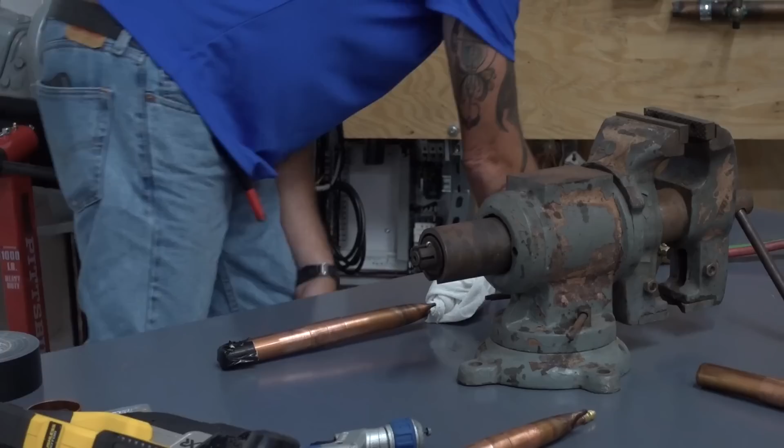In this next video in the series, we're going to talk about the importance of nitrogen purge and nitrogen flow. We're also going to introduce a basic calculator I've spun up to help us calculate how much you need to purge before you flow. This is the first time I've ever done this, so some of you may have additions, changes, or suggestions for it. I'm always open to that feedback. But the basics are we always need to purge enough nitrogen to displace the oxygen before we flow.

I was going to talk through application, which starts with: what are you actually looking for, what do you do when, how important is it when, and what steps do you take in the field. I asked some guys, hey, when you are flowing, when is it easy to flow nitrogen, when is it not so easy, what are some things where you think it might be impossible, and how do we work through that? So we're going to go through best practices for application.

The first thing is your piping, when it comes to the job, you want it to be capped. If you have a supply line come through and it's uncapped, it already has oxides built up, and you're never going to get that back out. So send it back. They're supposed to send you hard copper shipped properly. So anytime you open it, look at a fitting, or go to put something together, look through the pipe first.

You want to be looking through, making sure you removed both of the caps, that they sit flush, making sure that's not there. We've all, in running service, found weird stuff in a filter dryer or a separator and thought, how did that get in there? Not sure how it got in there, but on service calls we've found coins, screws, things where you think, who in the world did this?

But it's easy to do. You have a bucket there, somebody dropped something in, you set it down for a second, somebody kicked something into your pipe. Before you actually dry fit a joint, you want to look through whatever it is and make sure you don't have something in there. So that's the first application.

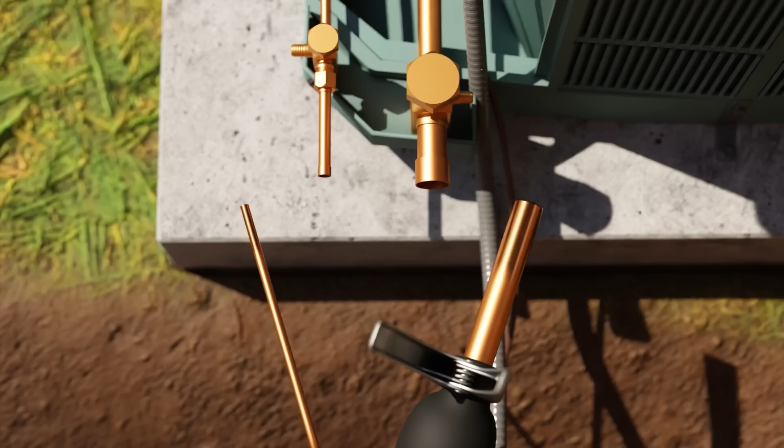Once it's out, you're reaming it, getting rid of that little edge from when you cut it. Once again, this is where application is important. Reaming is important, it helps the overall flow and helps it not catch oil.

But if you're looking at a pipe that's sitting straight up and down and you don't have any opportunity to get it sideways or down before you deburr it, I'm going to go ahead and say don't deburr it. The bigger evil is to drop that burr down in the pipe than it is to leave it attached to the pipe. A lot of that is to say being conscious of your application and what you're doing is the most important thing.

Complacency is what kills things across the board. As soon as you become mindless - I do this all the time, I grab that piece, put it in, move on, this is what I do - and I know a lot of what you do can become monotonous, but that monotony and complacency becomes the killer. The thing that you didn't even realize you did, not where you made some conscious decision because of application.

This is the best way to do that. Rarely is that going to be wrong. Most people here are intelligent people, and if you're actually engaging your think brain, you can come up with the best application for what you're doing.

It's when you get in that mindset of 'I'm tired, I'm working,' that's when really dumb things happen. In the pipe fitting side, even more so in service, you hear these stories. Matthew can tell you some stories from where he worked previously, stuff where you're like, how could somebody possibly do that? And it happens because you've been up a long time, you've worked a while, and you're doing a thing without engaging your think brain. So that's a lot of what I'm going to go through.

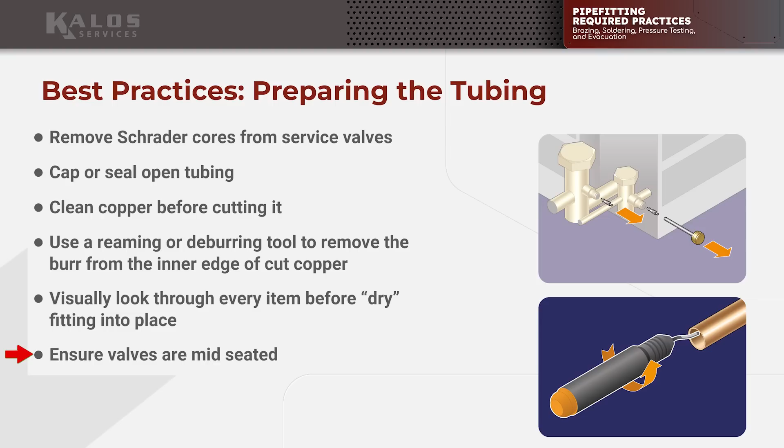So you just get in that habit of every time you look through, you dry fit, then you move on. Another thing that came up a lot for bench fitting, when you're pre-making a bunch of valves: if at all possible, you want that valve mid-seated, meaning in that middle point, because if you compress the gasket while you're heating it, it doesn't take a lot of heat to deform it. So if you're putting in a ball valve, set it at a midpoint. An EPR, adjust it to a midpoint. CDST, get your little tool out and pre-open them all to 50%. All the way back seated is compressed, all the way front seated is compressed, so anything with a seal, you want that in its open state while you're getting it heated or unheated.

Another key thing, the question came up about when you're bench fitting and assembling valves — how do you flow nitrogen when you do that? If you think about it for about 3 seconds, you can figure it out: you can put the hose in the end and tape it off, or come up with a plug that still lets you flow nitrogen. If it's really closely assembled and you're afraid it'll melt your hose or whatever, wrap a rag around it or something. But you still want nitrogen flowing through that valve.

Cleaning it later, cupric oxide just doesn't come out easy — if you've ever tried to do it, it's a pain in the butt. The only thing you're probably not going to be able to flow through would be a hermetic compressor. So if you're working on something smaller with a hermetic compressor, you're obviously not going to flow through it, but you can still displace as much oxygen as possible. We're never going to get 100% of the oxygen out, we're not even trying to, but we're trying to displace as much of it with nitrogen as we possibly can. So be creative if you have to.

The thing I always want to say is don't let an ideal of perfection get in the way of doing the best that you can right now. So you're doing a whole new setup where you're pipe fitting, the application is perfect, you get it all set up, you purge — I think the next slide covers the purge.

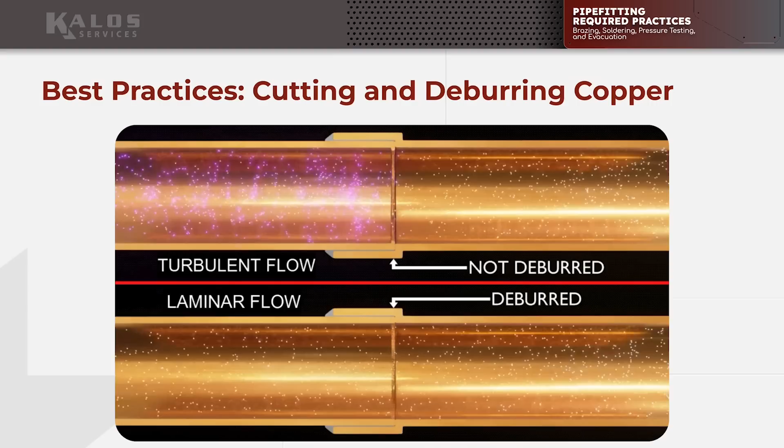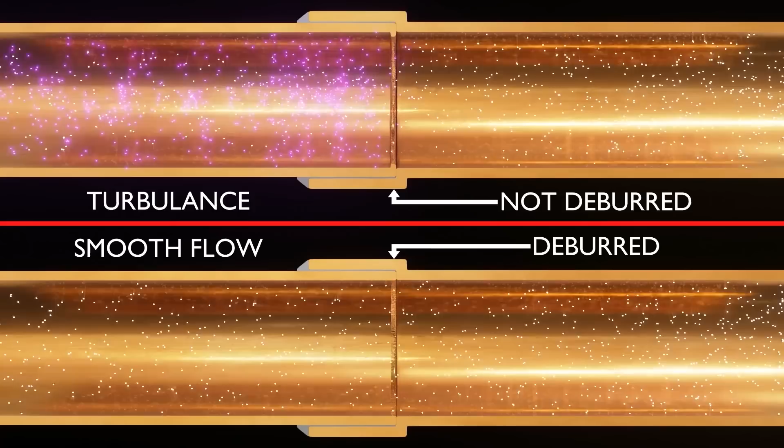First, we want to show quickly, this is the reason why you deburr. It actually matters more in market refrigeration than in a lot of other spaces, because that turbulence builds up — as Nathan said, it can gather oil, but it also actually presents resistance, so you get turbulence on the other side of a non-deburred section. But we don't want deburring to become a bigger problem, because we're dropping copper shavings, and just blowing some nitrogen afterwards isn't going to get rid of 500 feet of copper shavings left in the tubing. So we don't want to create a problem while solving a problem, but deburring is a nice standard practice, and they make tools, those circular deburring tools, that make it pretty easy.

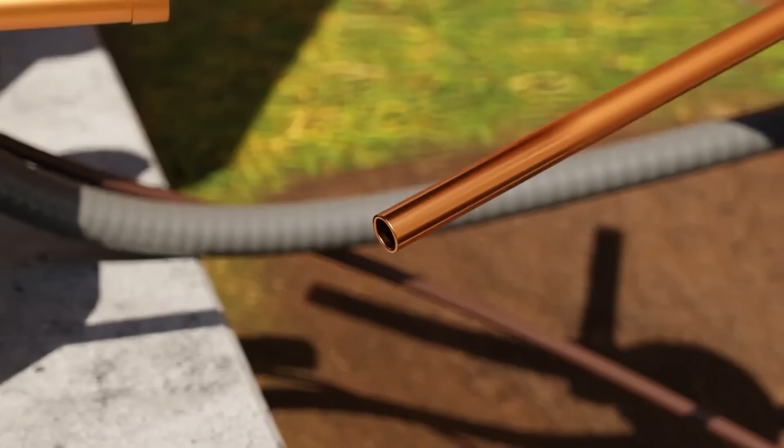Some of you use the old pencil type. But deburring during pipe fitting is a step that gets missed a lot in the industry, but it is a good best practice and does help with oil return.

You can tell, you'll even hear sometimes a loud circuit. Now sometimes that can be that the gas is flashing in it, so that might not always be the case, but there are loud circuits. It usually is that there's some sort of irregularity there, so you're not getting a laminar flow through it, so you'll hear refrigerant moving, and a lot of times that's that the burr is pretty good in there.

Now we're going back to, this slide is just about when you're inserting it, the rule of thumb, which I never actually thought about until I asked why different size couplings have different depths. It's just for strength, you want that insertion to be about the full dimension of the pipe, so your coupling will be twice as long as the dimension of your pipe. That's just for pipe size, strength, whatever.

You're trying to draw that alloy in there, correct. Not all the way to the center, but you're trying to get at least half of that fitting. You're wanting to see that discoloration of drawing the alloy in that far. That tells you have penetration.

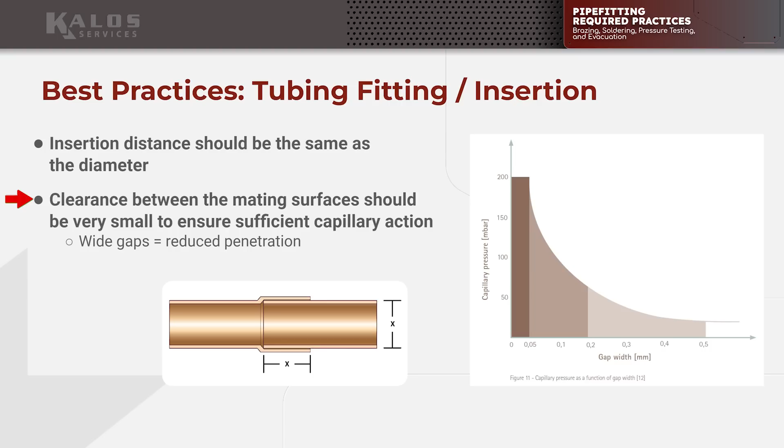Same thing with the capillary action, you need a certain size gap. That's basically just saying use the right size coupling for your pipe. Don't say, hey, I'm out, so I'm going to put too big of one and crimp it down, or I'm going to do an inside coupling, so I'll just take a smaller pipe and put it in. If you're using the right size coupling for the right size pipe, your gap is going to be correct.

But same thing if you have a bent piece of pipe and you're like, well, it fits and I can fill that gap - just go ahead and cut it back past that bent piece and get a good fitting there, particularly when you're doing a new line set, new store, so there's no time constraint. Let's go ahead and get it correct.

It's counterintuitive because a lot of people think bigger gap means you'll pull in more solder. It's not - the tighter the gap, the more capillary action. That's how capillary action works. The smaller the channel or gap, the further it will actually draw in.

Right, because this isn't like fitting PVC, where I've had guys say that if you have it too much, you'll scrape it off. It's not glue, we're not gluing the fitting. You really do want it tight enough that it'll take some force to get it in, but it will fit.

So same thing about being cognizant - you ever push it in and it just doesn't feel right, like it goes in real easy? Maybe take a minute and think through it. Maybe you have a plumbing coupling for some reason, maybe something's wrong. You should get used to it taking some force to get those seated.

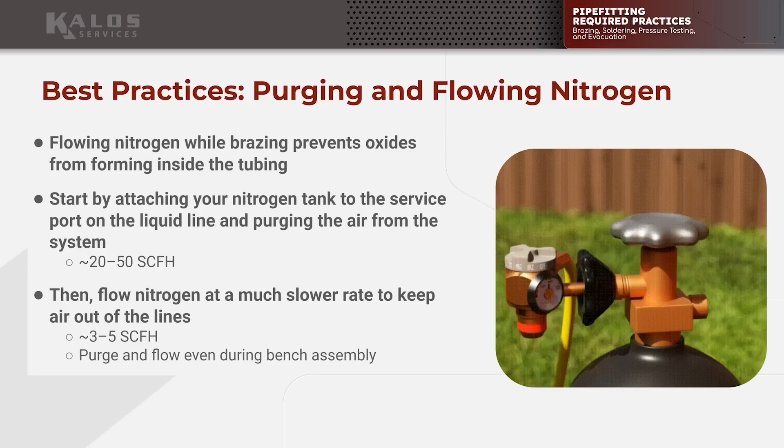So this gets us down to the meat of what we're talking about, which is flowing nitrogen. I wanted to go through - this is telling you how to do it, which everybody should know the basics on, but I'll also walk through some terms. Guys will use different terms - I've heard people say, oh, well, you purge nitrogen while you're brazing. Fine if you say it, but it's not the correct thing to use. Purge is while you are displacing oxygen - you're getting all of the air out and getting it replaced as much as possible with nitrogen in there.

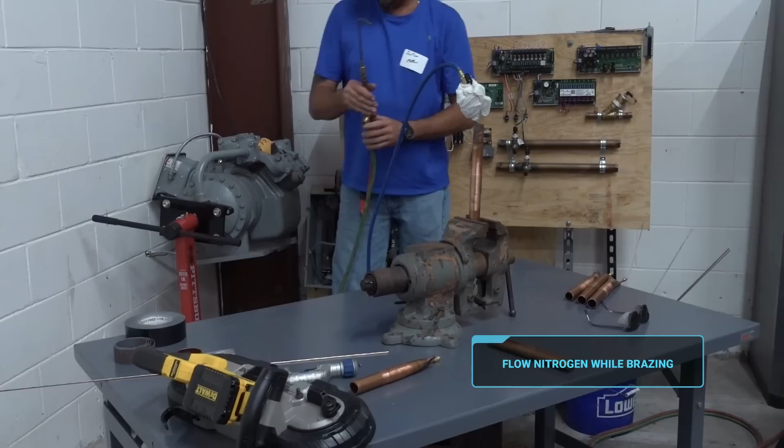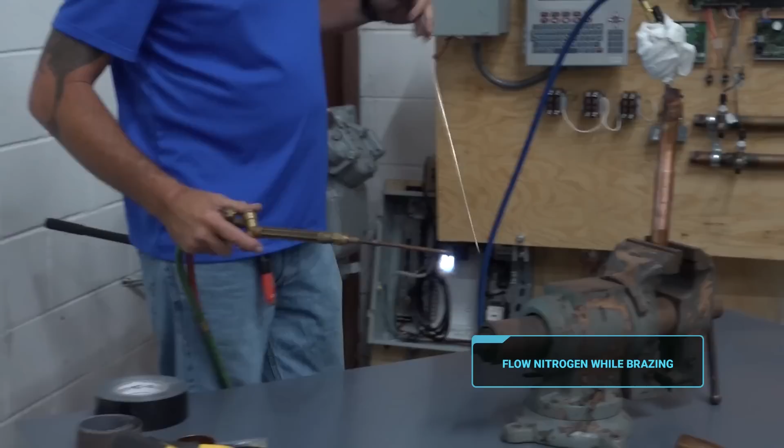Then you're backing it down to flow, which is you're still adding some, so you're at higher pressure than the atmosphere, so air doesn't come back in what you just purged out of. This was actually an interesting thing where we needed to get a recommendation for how much purge to do, because up until now you've always just told people, well, purge till there's no air, that's the end. So I was thinking through, well, how do you know? It's pretty easy if you're doing a 4-foot piece of pipe or a 20-foot piece, but what if it's 500 feet of 3 1/8 inch pipe? How much purge do you need before all of that's out of there?

Looking through, guidance on how much nitrogen to use didn't really exist. Anything that told you how much to do basically just said, do it until the air's gone. That doesn't work for me because it doesn't tell you anything. So we built a little calculator. It's in your form, there's a download for it, you can find it later. You punch in your feet, how much whatever, and it'll tell you how long, at what pressure should you purge, and how much of your tank that's going to use.

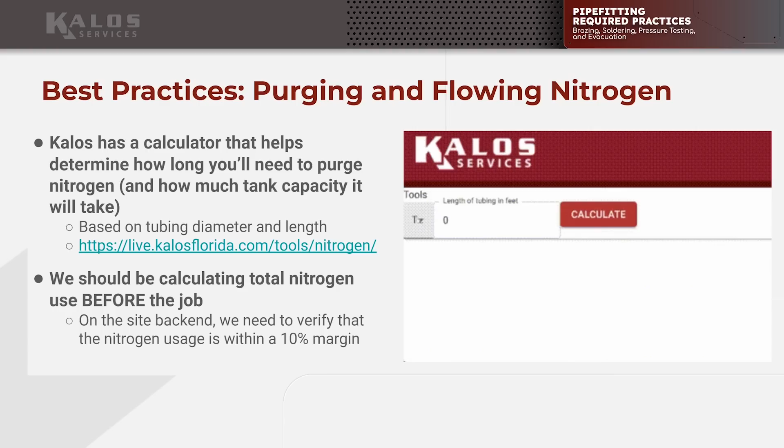So you have an idea how much got out. After that, it gets easier, because how much should you add once you're brazing? Just enough that no air can come in. That part's pretty easy: you put some tape over the end, you poke a hole. Can you feel air coming out? You're good. Can you not feel anything at all, like you put your hand over it and you don't feel anything? Well, then maybe you're losing a little bit through the joints and you may need to increase it.

That's a really important distinction. We're not pressurizing, okay, we're flowing. That's why we use a flow regulator, not a pressure regulator, for flowing. We don't want to pressurize. Of course there is a pressure differential, but it's infinitesimal, it's tiny. We do not want to pressurize, because pressurizing causes your joints to blow apart when you're trying to braze them. You want a tiny flow, 3 to 5 SCFH, which if you want to be really technical, that's exactly one gnat fart worth of pressure.

So it's scientifically proven. Whereas when you're purging, that's when you open that regulator up. The math I did for this calculator is based on 20 to 50 SCFH of flow for a typical nitrogen regulator. You're going to have some regulators that produce more than that, but I'll give away the lead here: we've got to purge a lot longer than anyone ever thought once we did the math. It can be a long time, it can be like 5 minutes in some cases, where you're leaving that thing open, setting it to 100 PSI, and just letting her fly.

And who knew, right? You look at all the books and manuals, nobody tells you. Like Nathan said, they just say, till the air's out. So it just took a little bit of math, that's why we created that calculator. Because my assertion is a lot of times on long runs you're like, I know I flowed nitrogen. Now there are cases where we didn't, and that's the bigger issue, but you still find issues. I think that is the thing, we did not do a thorough purge, because once you go to flow, you're barely moving any nitrogen through those lines.

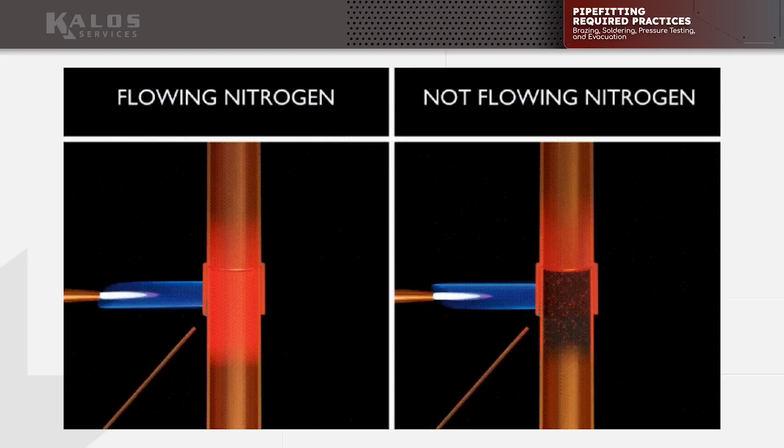No, and so here you have the example of flowing nitrogen versus not flowing nitrogen. It's just a nice little demonstration of that happening. But all of that is to say that application changes, it's there, but if you are actually just thinking through, okay, what's the best way to do this, it's not actually difficult.

And so you do have people, you do have some objections there. They're usually a fake objection. It's just an objection because it's difficult or I don't know what I'm doing on it. If you feel that or you hear somebody saying that, stop, engage your actual think brain, work through it. It's not difficult to figure out a way to get to a very good end result without a lot of cupric oxide.

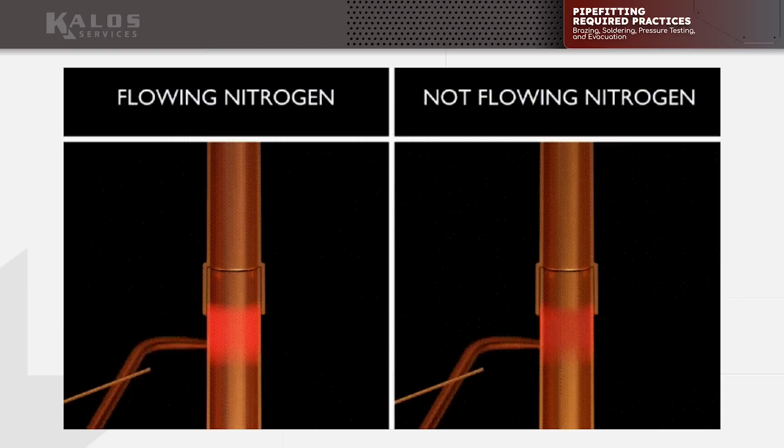Another thing your old-timer buddy used to say to you is some version of, well, I don't have to do that because I just make sure not to get the pipe too hot, because those flakes happen when you get the pipe too hot, right? Well, those flakes also happen on the inside when you get the pipe hot enough, because if you don't get it hot enough, yeah, you could seal the edge and not end up with a lot of cupric oxide on the inside, but you didn't actually pipe fit properly, right?

So if you are pipe fitting properly and you are not flowing nitrogen, you should have a crap ton of cupric oxide on the inside of that pipe. Do you understand what I'm saying? So if you're not, it means you're not getting hot enough. So it's okay for that to happen, but it's not okay because you should be flowing nitrogen, right? So you got to do both of those things.

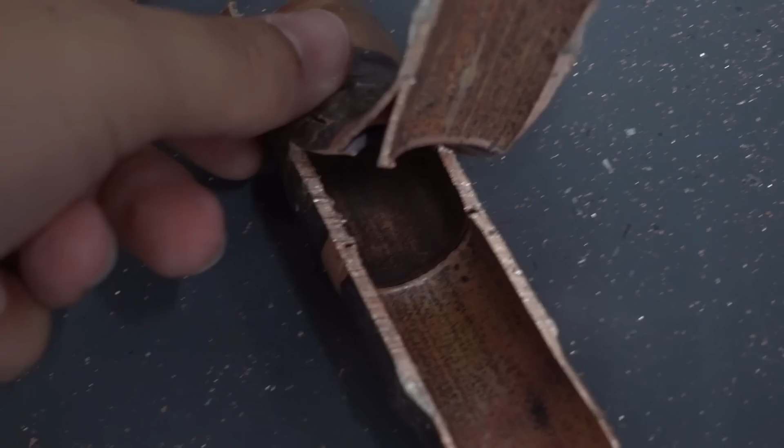A lot of people believe that the black stuff comes from your torch. Again, it does not. It comes from the interaction between oxygen and the copper. We should not be afraid of getting things hot enough for cupric oxide to build up. We should absolutely prevent it by flowing nitrogen.

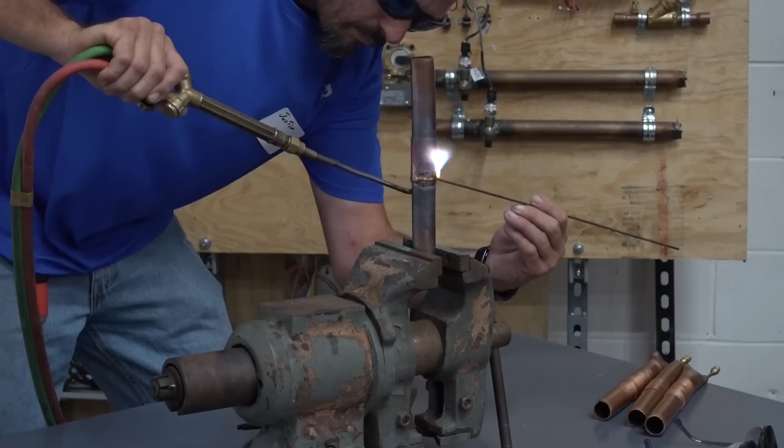No, I mean, and you'll see when we go over and do the actual bench test, it's not iffy, right? If you flow no nitrogen, it is very obvious that no nitrogen was flowed. So those of you who are like, oh, well, you know, I do it a little, it's not. I know how the results will look. It's not like, oh, maybe. It's like, no, there's no doubt.

It's pretty—maybe it happens if your tank was running out, or you didn't purge quite enough, that can be a maybe. But if it did not flow at all, I don't care how good of a pipe fitter you are, it looks surprisingly bad. The first few times you do it, you're like, whoa, that was way more than I thought. So it's not really that complicated.

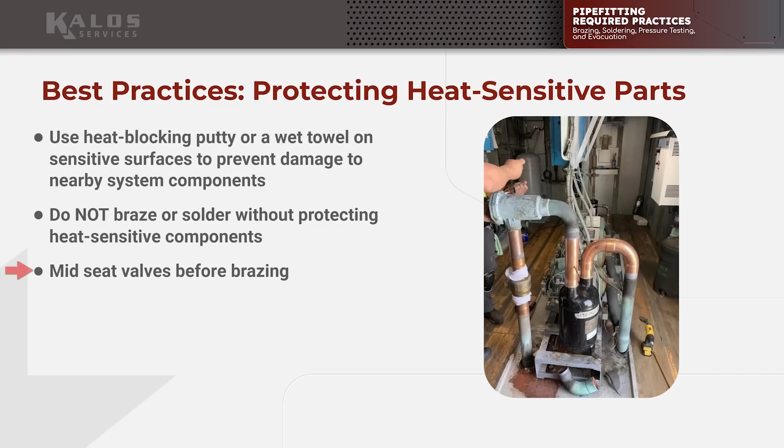Same thing, best practice is protecting heat-sensitive parts. It's not complicated—once again, mid-seat your valves so they don't compress. If there's something on it that isn't metal, anything with a gasket or whatever, just don't let it get hot enough to melt it. That's the end. And people will be like, well, what does that look like?

It just looks different for different applications, but you kind of know. You can wet rag it—they have good putties and stuff you can use now if you can't use a wet rag. You can see he kind of protected his valve so there's not going to be bleed-by to his accumulator. It's one of those things where guys will sometimes act like, 'oh well, I overheated it, but I was protecting it.' And no, you weren't. It's not hard to keep it cold enough that it doesn't melt.

Once again, perhaps if you have a valve really tightly seated, then it doesn't take a lot of heat. But if you're following everything you should, it doesn't really happen. Don't be cute with your heat, protect the parts, right? A lot of guys are trying to be cute with their heat because they're not protecting the components. If you're protecting the components, then you can get the joint hot enough to make sure you draw in via capillary action. Make sense?

So we actually have charts, we have information that you can go back and reference. This is not an in-depth class to teach you every tiny little thing about brazing—this is to show you where the information is at so that you can do the homework, right? Brazing is intentional, guys. When we're going out to the field, when we're selecting our brazing alloy all the way to the actual base metal that we're going to be brazing, we have to be intentional with our design, with what we're setting up here, between the copper connections to torch tip selection.

Does anybody know the two things we have to go by to select the correct torch tip? Those two things that determine your torch tip selection are piping diameter and application. So when we talk about application, we talk about clearances. As everyone knows here, some of you are service technicians—there are certain applications where you can't get a full-size torch tip for the diameter pipe you need in a low access area, whether that's inside a mechanical closet, a cabinet, an elevator shaft, underneath or beside a compressor.

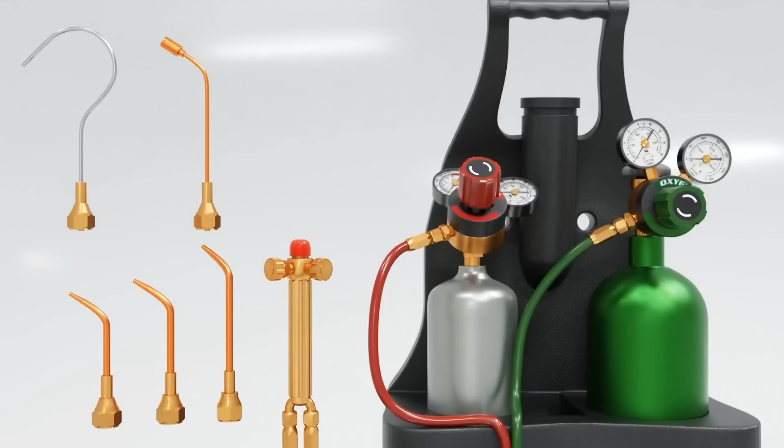We've all been there in those situations. There are specific torch tips designed to apply, as you can see here in the demonstration, the Captain Hook, rightly named because it looks like a hook. It allows you to apply the same amount of heat with multiple actual orifices to create that heat that you need, which you normally would get with a rosebud tip or a standardized tip.

Now back to the first part—tip selection is based upon piping diameter. You'll notice at the base of every single torch tip there is a number. That number is a manufacturer's number to reference the orifice size at the end of your tip. The tip selection is designed based upon the actual diameter of your pipe to apply the correct amount of heat that you need to get that joint as hot as it's supposed to be, 1300 degrees to melt your alloy and bring it in with that capillary action we talked about.

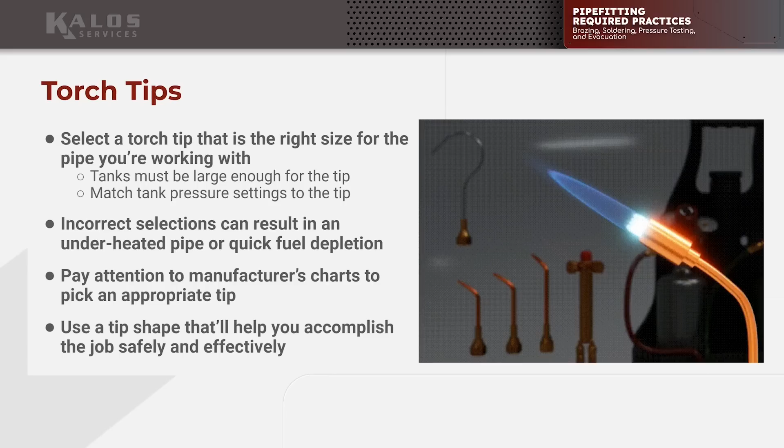What happens when I select a tip that's too small? I spend a lot of time brazing, as I've heard it called in the industry, building stalactites and stalagmites, right? We're not building sandcastles here. We're trying to heat the joint to a specific temperature to actually get that alloy to become a liquid—not only a liquid, but flow freely within the joint that we've cleaned and that we're purging with nitrogen.

When you select a tip that is too small, you're going to inadequately heat the actual copper fitting itself, and you're going to build a bead across the top surface there, and that is not the correct application. You'll find that through vibration and movement in that pipe, that'll eventually lead to leaks, if not at pressure testing, then over time.

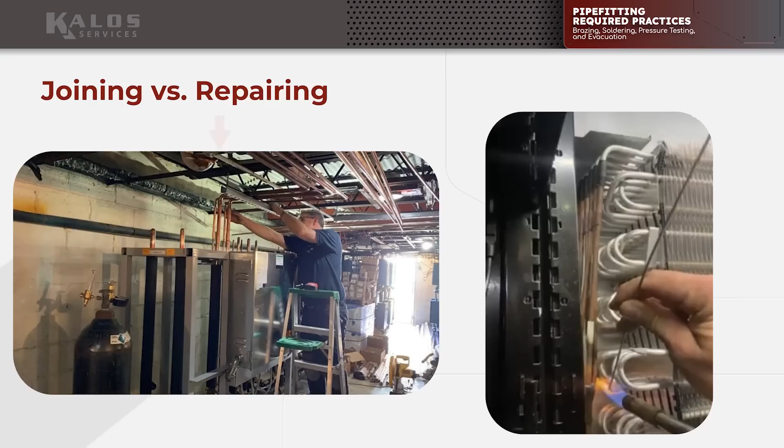We're joining, not repairing, as Brian said. The other side of that, what happens when I select a torch tip that's too big? That results in unnecessary fuel usage.

As everybody knows, our fuel is in tanks, and those tanks only hold a specific amount of fuel. If I choose a torch tip that is 3 times larger than the pipe I'm going to be brazing, instead of being able to do 20 joints in an hour, I'm only going to do 3, because I just emptied my tanks trying to hit that specific goal.

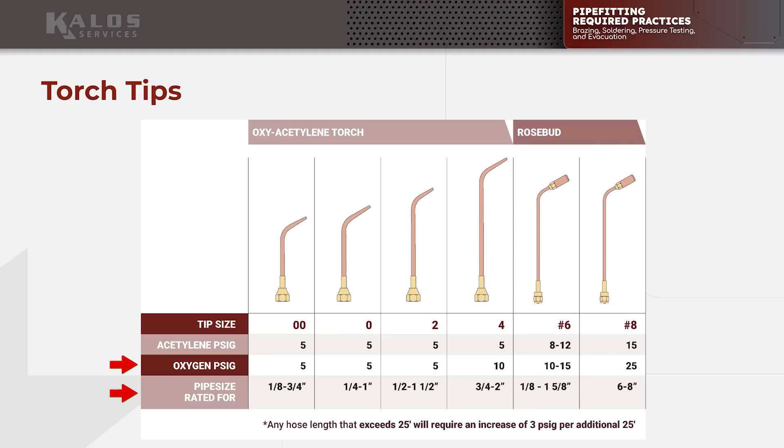Rosebud tips are designed for larger pipes. The 2 things to remember here, guys: we select off of piping size, and we're also going to ensure that with our regulators, we are setting the correct pressure for oxygen and acetylene. We have 2 fuel sources here to make this happen. Every tip is different. Based upon the tip size you have will determine how you set your oxygen and acetylene rig to the correct pressure so that you get the correct amount of heat.

This is a long step process. You understand it in the field after you go through it numerous times. And most of you technicians already have your favorite tips - you know exactly what they should be set to and what application they apply to.

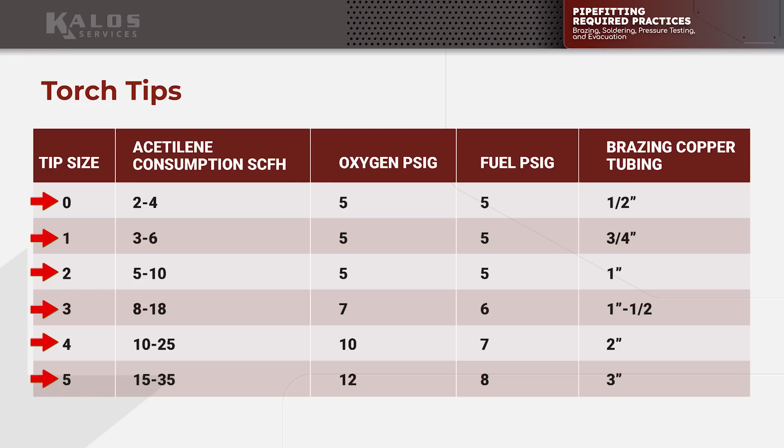And the last thing we talked about, that's the acetylene consumption, that fuel consumption. You'll notice here as we get to a larger size - 0, 1, 2, 3, 4, 5 - that acetylene consumption, the SCFH, goes up. Your tank only holds a specific amount of volume. If you need these numbers, you can find them - Uniweld does a great job of documenting this on their website for every tip they make.

There are 17 different types of acetylene and oxygen torch tips that look like this for brazing and soldering, and there are a vast majority of other tips - rosebuds, you name it.

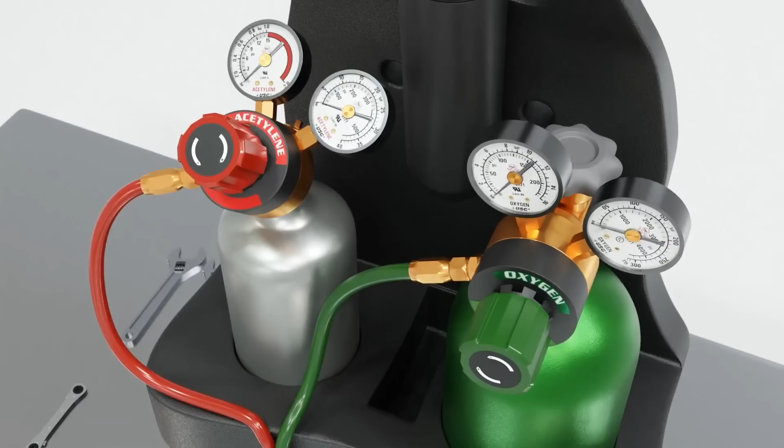So, setting oxygen and acetylene pressures. You'll notice here on the tanks, left-hand side, as you're looking at the tanks, is your actual pressure for your hoses. The right-hand side is the gauge for the volume of gas or fuel left in your tank. So left side is hoses, right side is tank pressure - whether my tank is full, whether my tank is empty, whether my tank is a quarter full.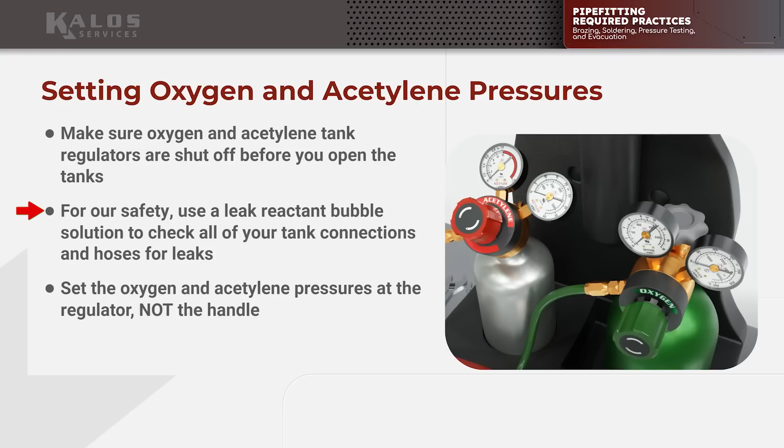That's all determined here. Now, one thing I can't stress enough: safety. It doesn't matter if it's your torches or somebody else's torches that you use every single day - you should be, anytime you go to braze and turn on your tanks, since you're leaving them closed when you walk away, you leak check. Leak check, leak check, leak check. I have seen some pretty nasty disasters in my life in this field due to skipping that step.

Things happen when you're not around, guys. Tanks fall over, someone knocks it around in your van. If they're not yours, it's all the more reason to go through these checks.

Like Brian said, don't oil the oxygen fittings - it's the same thing. When you pressurize your tanks and fittings, you want to check your regulator as well as your torch handle. The last thing you want to do is braze something and find out your acetylene is leaking from your rig. Lord forbid it doesn't ignite, but you only get one fitting in before your tank's completely empty. It's all happened to us. We've all been there.

Safety, safety, safety. All right, so let's talk about flames. We've talked about torch tips, we've talked about fuel consumption, we've talked about how to select the correct torch tip for your application based upon piping size as well as application.

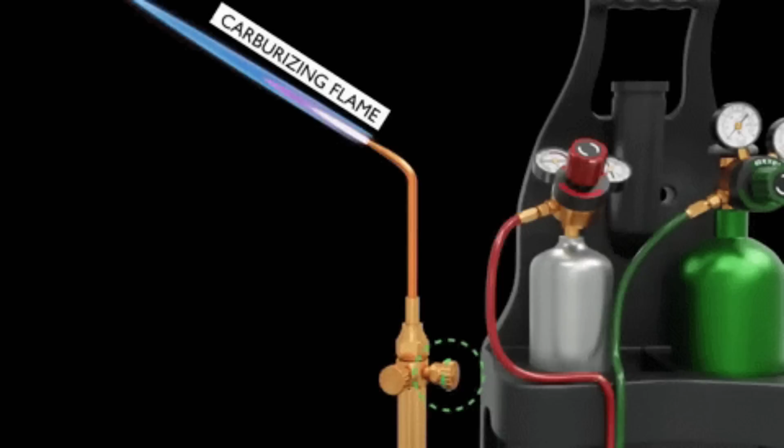Let's talk about flames. There are 3 different types of flames: carburizing, neutral, and oxidizing. Easy way to remember this, guys. Carburizing is too much acetylene, right? We've got a flame tip that isn't actually combusting all the acetylene that we're expelling from the torch itself. What does that do? That actually causes a chemical reaction with the surface of the base metal that you're not aware of, right? That's excess carburization. It's not the cupric oxide that we just talked about, right? It's actually something completely different.

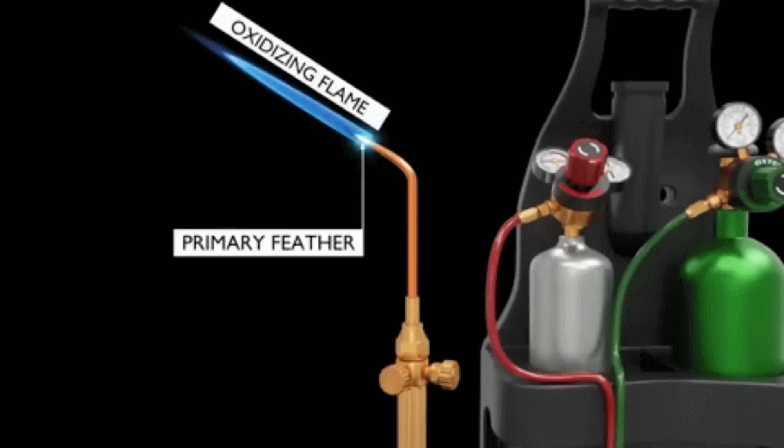Let's talk about oxidizing. We broke down the word oxidation, right? It's the same thing. Oxidizing flame is too much oxygen. It's excess oxygen at the end of your torch to where it's not being combusted. Why is that bad? When we talk about brazing a joint, we talk about brazing a connection, we are flowing nitrogen. But at the time of starting that braze, our flame direction into that joint, onto that male side fitting, down into that coupling, is forcing that heat down in there. You will find that there are rare scenarios where an oxidizing flame will actually cause that cupric oxide to build up inside that joint because of the excess oxygen, because of the torch being set up incorrectly.

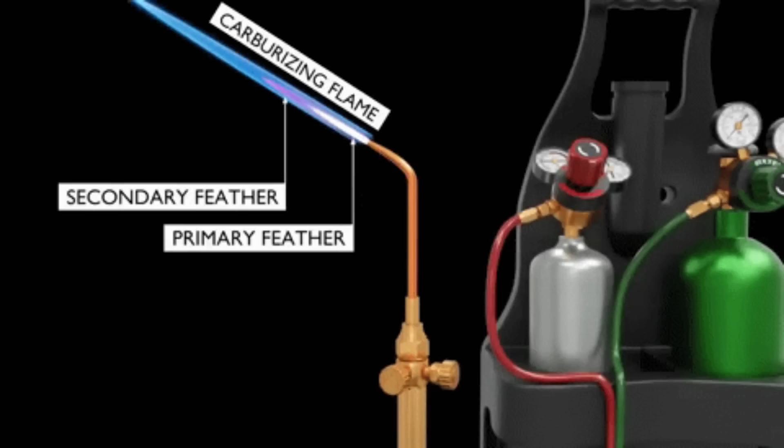So what we like to say is you want a neutral flame. It's also, you guys have probably heard in the industry, called a natural flame. A slightly carburizing flame is okay, but I preach neutral flame all day long. That is a large secondary feather and a small primary feather, right? You can also tell someone who has an oxidizing flame because the torch is very loud. It sounds like a jet engine, right? If you can hear the jet engine, you're not doing it right. Go back to the drawing board. Look at your torch, adjust it accordingly, and make the change.

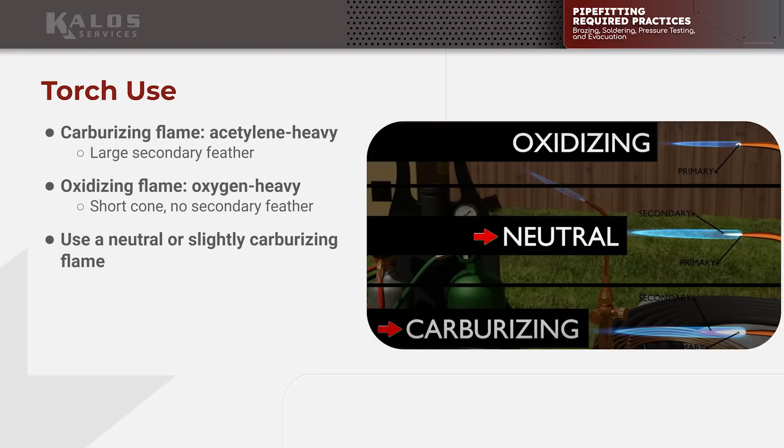This stuff matters, guys, because if you're burning your torch incorrectly, a neutral flame is a balance 50-50 of oxygen and acetylene. Carburizing flame is too much acetylene, you're going to run out faster. Oxidizing flame causes oxidation as well as running out of oxygen before it's supposed to.

To the point of oxidizing, it's not just about, again, this is obvious, right? Oxygen bad, right? We all got that. It's not just about getting it inside the tube. When you have an oxidizing flame, it actually creates more oxide buildup on the outside as well, which interferes with making a connection. Anybody here ever weld and use shield gases on the outside of a weld? Well, shield gases, what you're doing is displacing oxygen from the outside. When you use an oxidizing flame, you're introducing oxygen to the outside, not desired.

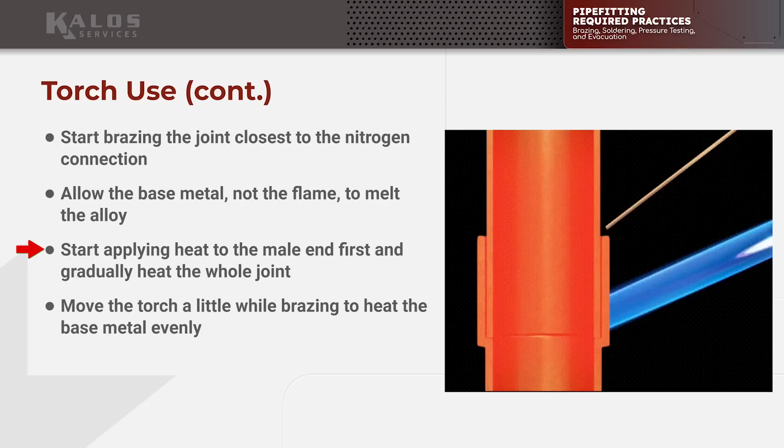No, that's a great point. So we talked about it before, guys, but when we talk about brazing and technique, we've talked about torch tips, we talked about torch tip selection. When we're brazing the pipe itself, we want to heat the male end first, right? That heat is going to traverse the joint down into the actual connection itself. We heat the male part first, and then we work our way down to the coupling. Remember, the point of this process is not to allow the torch flame to melt our alloy. If we're melting alloy with our torch flame, we are doing it incorrectly. Your base metal should be hot enough to melt the alloy on its own.

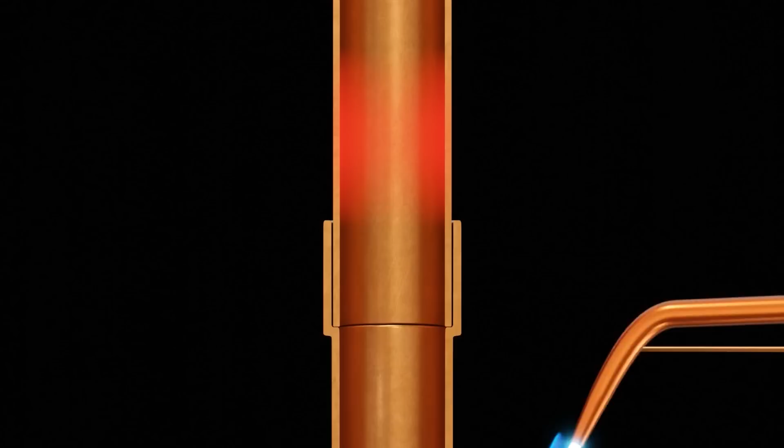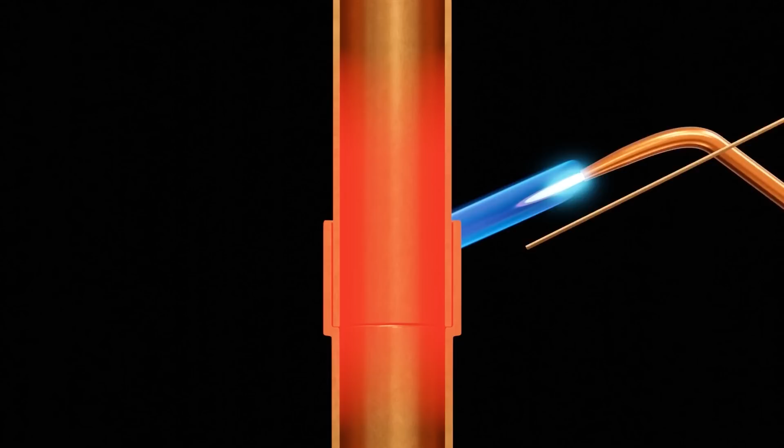If you have correctly preheated the pipe, male end down to the coupling, and you get to the correct temperature, which we're going to show you on the next slide, that dark cherry to medium cherry color, you'll find you don't have to do any additional work. When I touch that alloy and it begins to equalize temperature with the joint, it melts right away. It becomes liquid very fast.

I'm going to create a bead across the top instead of filling the joint. We're not actually joining anymore, we're repairing. That leads to leaks, cracks from vibration, pipes blowing apart — we don't want any of that. We're joining here, and all of this is intentional. It's doing your homework, your research, understanding what you have, what you're using, and when to use it.

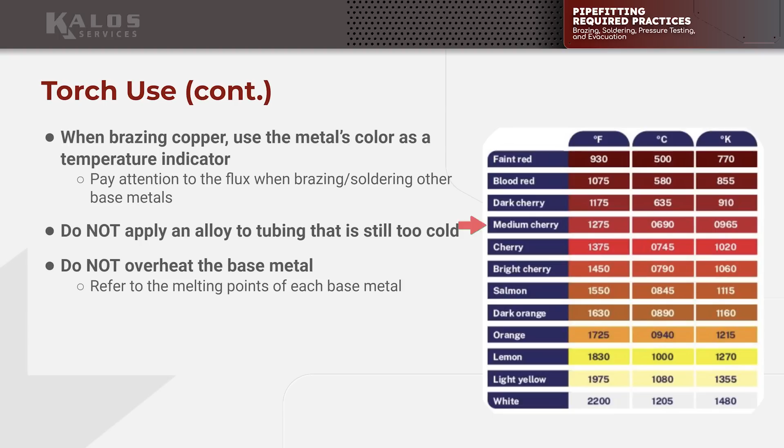And that's really common in the trade. A lot of it is because people come up through residential or commercial work where you can get away with a lot — you can put just a little cap on top and it's fine. But if you're working near a semi-hermetic compressor on suspension with really high temperatures and a lot of load variation, you're going to find out real quick whether you were good at brazing.

Copper doesn't break the rules of physics. As it changes temperature, whether it equalizes to room temperature or goes down to 30 or 15 degrees, that copper will actually contract. It moves on the racks — that's why we don't strap our rigid copper horizontally. We have to leave room for it to actually move. And that's even more so the case in VRF systems.

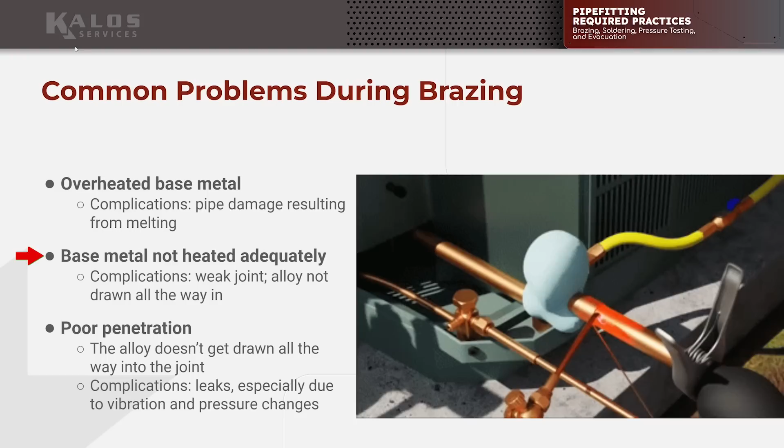But common issues: an underheating issue — it doesn't pull into the joint, you get a bead across the top. We've talked about those issues. Overheating the joint — we touched on that being bad, you blow a hole through a pipe. Let's talk about the other downside.

When you overheat a pipe, you change the physical characteristics of that pipe. It's no longer a round hole, it's an oval hole. If there's any weight or pull on that line, anything pulling it in a different direction, overheating will change the physical properties of that joint and it becomes too large. Then you go to braze it and you're sticking 5 to 6 rods into it, just pooling up inside the pipe. Or, Lord forbid, you overheat it to the point where there's a bit of pressure and it pops apart. Overheating, just like underheating, is just as bad.

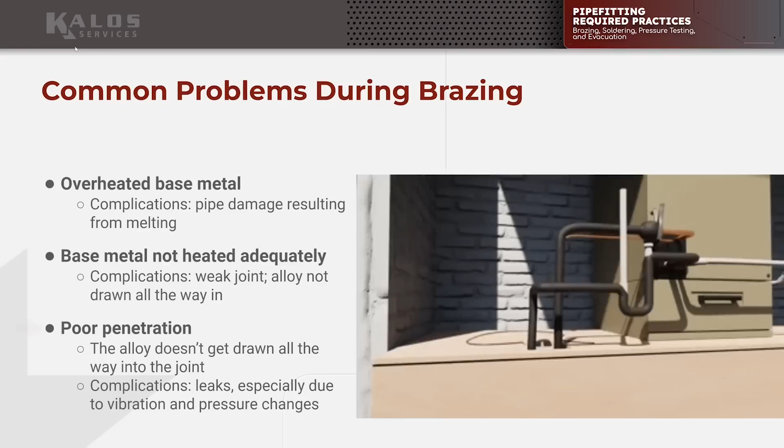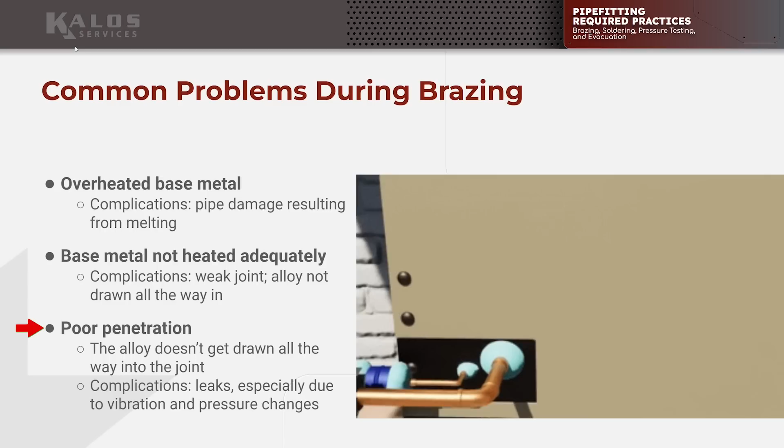And the last thing: poor penetration. We talk about fully inserting your copper tubing into whatever joint it meets, whether it's an elbow or a coupling — you want to make sure it's fully seated to the backside. We are not just sticking them slightly together and hoping it holds. It's only as strong as its depth, which is the same as the diameter of the pipe, and should be.